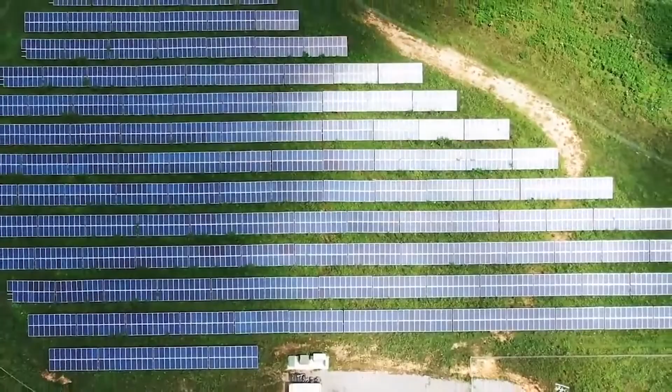The NATRIUM reactor creates heat, which is used to increase the temperature of molten salt. That salt is then deposited in a hot salt storage tank. Operators independent from the reactor can use the heat to generate electricity immediately or reserve that energy for later.

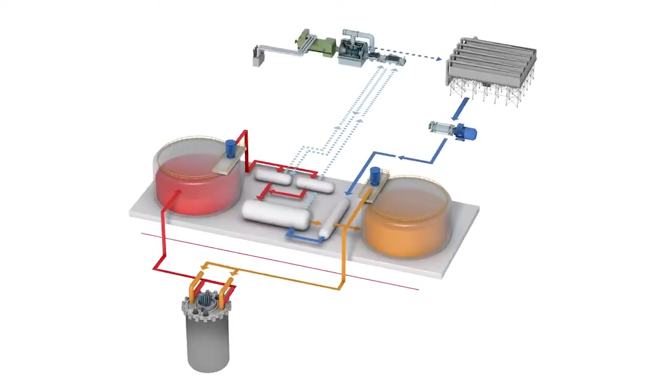The stored heat allows the NATRIUM system to be uniquely flexible. It can rapidly ramp electricity production up or down based on demand or the availability of renewable sources. The NATRIUM technology will be available as early as the late 2020s, making it one of the first commercial advanced nuclear technologies. Learn more at natriumpower.com.

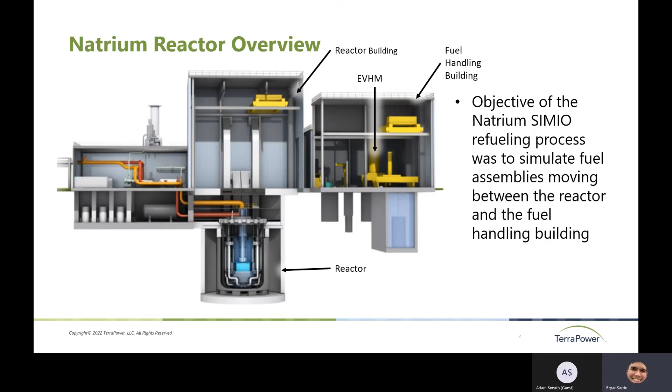And then once again, as the reactor emits or discharges fuel assemblies, the EVHM, which is on rails, can move it from the reactor area back onto the fuel handling building for processing. So it's an exchange of fresh fuel assemblies and discharged fuel assemblies, ones that have lived their life and provided as much power as they're going to the grid.

Hey, Bryan, can I jump in with one additional point? Hey, everyone, Adam Sneath here from SIMIO Solutions Engineer. I've been working with Bryan on this project. I think it's been a great application of simulation because it's allowed Bryan to create different scenarios, and create scenarios around the different parameters in the system, the processing times and so forth, to see how that overall time span has been affected. So I think that's really been an effective use of simulation to address the business problem. Just my 2 cents there. Back to you, Bryan.

All right, great. So one of the things that was particularly important for this model was the use of graphical representation for the fuel handling building and the reactor building and the various components moving those fuel assemblies back and forth. We even were able to implement fuel assemblies to scale in the simulation itself.

So in taking these two buildings, they needed to be to scale. In order for us to do that, we were able to bring in various models from this program, AVEVA, or if you have SolidWorks programs, or rather parts, you can bring those in and ensure they are to scale.

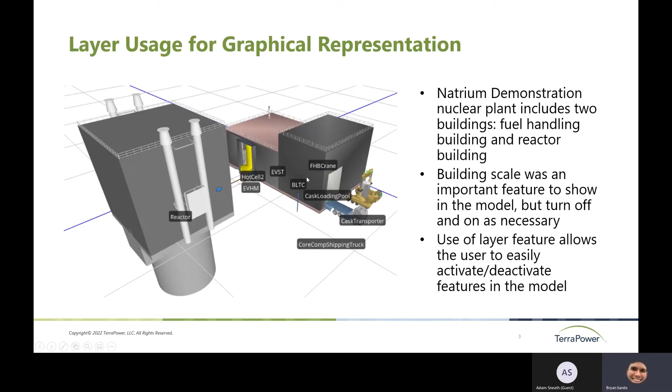So I'll just show real quick what it looks like in the model, how easy it is to use these layer features and then deactivate and activate them as well. Oops, got the wrong window open here. Let me just minimize this.

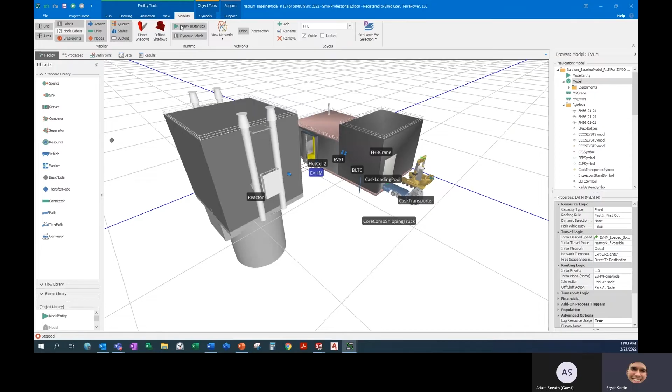So as you can see up here, we have symbols, but ultimately you want to be on the ribbon for visibility. And when you bring a specific component in as an object, or rather as a symbol, you can turn the visibility on and off.

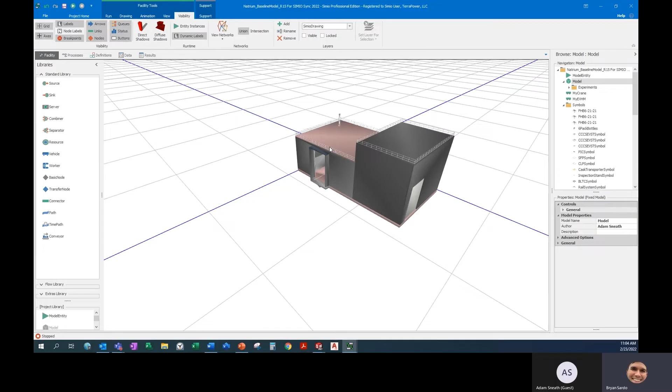So as you can see here, I have a layer called Fuel Handling Building, FHB, and I also have the reactor building layer. And then we went a little bit further and added some. With our SIMIO drawing layer, we basically have all of our SIMIO objects built onto this layer. So you can quickly turn those on and off too if you just want to see what one particular item looks like, the fuel handling building in this case.

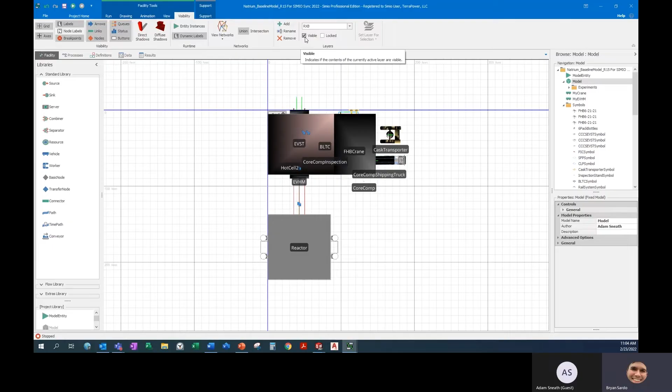So like I said, when you have these buildings on and you're looking at a 2D rendering of your simulation, if I hit run, you wouldn't see very much because everything's happening on the inside of the building. So while we're doing the run and making our recordings, we turn these layers off so that you can clearly see what's going on as the refueling unfolds.

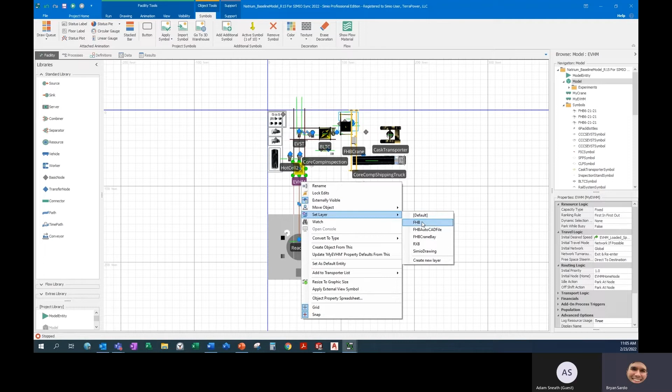One thing I didn't note so far is how easy it is to change a layer. You can pretty quickly right click and hit set layer and change whatever it is that you'd want. So if I change this to fuel handling building, it would disappear because we don't have it visible at the moment. So that is also something you want to be aware of while you're using layers.

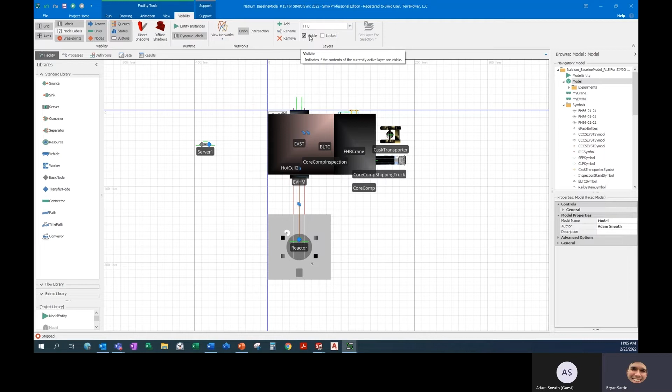You want to be mindful of which layer you are on as you are creating items, because if, say, you are on the fuel handling building layer and you bring a server in, well, the server is not there. That's because it was built back in the fuel handling building layer. So if you did goof up, and that might have happened, you can right click in here and turn it on to one that was visible at the time.

So now we have server one still being visible because I changed this layer to SIMIO drawing, which going back to the layers is shown here as visible. I believe that's all I have on layers at the moment. Adam, do you have anything you wanted to add to that?

Sure, just one final point there is that this feature was put into SIMIO about a year ago. I just pulled up the release notes to remind myself. So if you're seeing this and you're not sure if you have this feature, you can always check the release notes from the support ribbon, which outline all new developments. We release a sprint version of SIMIO every 3 weeks, which really diligent users may choose to stay up to date with. We have a major release about every 6 months.

But features like this in particular may be a good reason to stay up to date with your version of SIMIO. And if you ever had questions about how to update SIMIO, you could reach out to support@simio.com for a little bit of help. But yeah, looks great, Bryan.

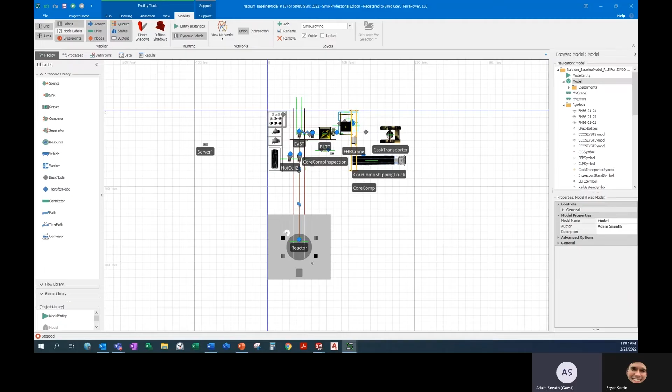Thanks for sharing that feature. Anytime.

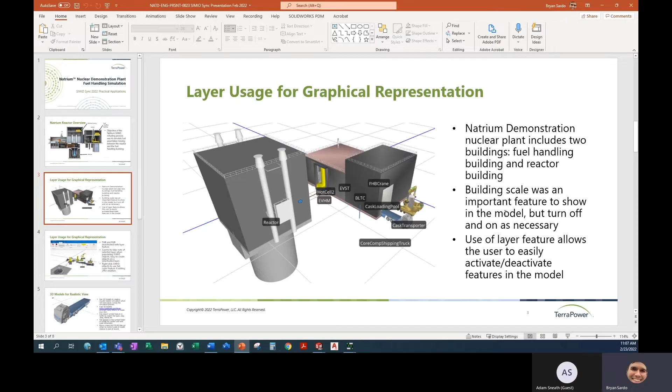So going back to the slideshow, like I said, it's easy to activate and deactivate the features. Let me just make sure I haven't missed anything here. Nope, looks like we have everything we wanted to say about that. I kind of just went over this while we were in the model. It's very, very important to make sure you know what layer you're on, and you can always right click and edit the layer after the fact if you maybe built it in the wrong layer.

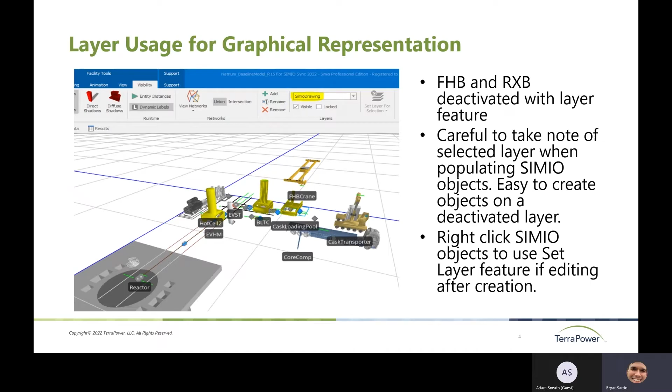The next feature that I like to talk about is use of 3D models for a realistic view. With the first few models that we built, we didn't have a realistic view to our simulation, but it quickly became apparent that it took longer to explain what it was that was going through the fuel handling building and in and out of the reactor. So it was important for us to understand how we could give it a realistic view.

And while that may sound like something that isn't necessary to have a good or very accurate simulation, that might be true, it doesn't change the accuracy of the simulation. But it helps those that are reviewing and have no idea what Simio is, or just need to know what is going on in the simulation. For instance, we have investors that are investing in our company, and they need to know what is going on in the simulation. So we wanted to create a realistic view, and ultimately we were able to do that by conveying the simulation process.

If you don't have 3D models, I recommend you go to a link such as the one that I posted here in the presentation. There are a number of other 3D model generators where you can get free 3D models and implement them directly into your simulation. And you can use the import symbol feature in Simio to import all sorts of file types like STEP files, DWG files, Blender files. There are many. OBJ file is another one that we used quite often. The file itself will appear in the symbol folder on the right, and you can do further color and scale refinement. And I'll come to that bullet point after I show a little bit in the model here.

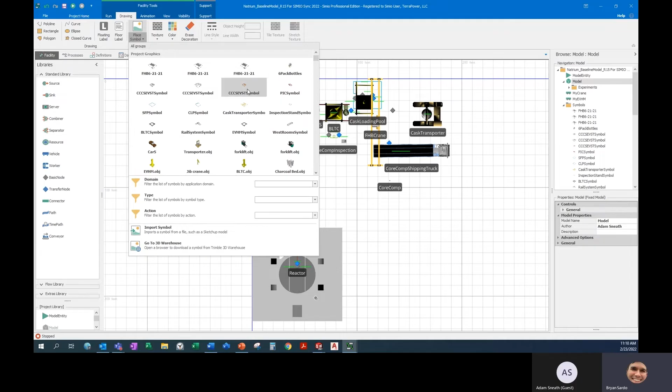So like I said, underneath the drawing ribbon, you can go here to place symbol, and you can see all the various symbols that we have pulled in. The ones that you pull in typically will show up at the very top, and you can use the import symbol feature to grab your file. Sometimes you won't see that file, so you may want to go back to the original spot where the file was generated and make sure that it is in a compatible file format like the ones I mentioned in the presentation slide. When you do pull them in, they show up on the right-hand side of the symbols. And you can see we went pretty crazy with our symbols.

Probably didn't use half of them. I mean, we certainly didn't use the Tesla Cybertruck, but you can see that that is in an STL format. We were just playing around a little bit and found a Tesla truck that you can bring into a Simio model.

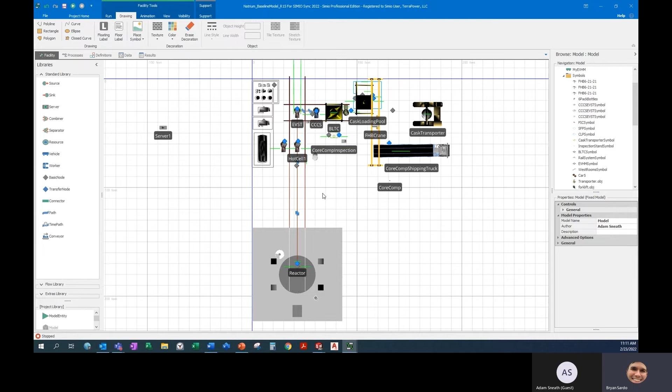When you do have that symbol pulled in, you can go into the symbol and edit the scale as necessary. And when you bring it into the model, if you were mindful about the scale as you were building the model, you can pretty quickly understand if your item is to scale or not. Using the scale on the upper portion of the grid here, you can see roughly what the scale is, and back in the symbol area, you can understand what the size of your truck is, or your cask transporter in this case.

One of the things that we did to begin with was we had an AutoCAD file that was showing a plan view of the fuel handling building and of the reactor building.

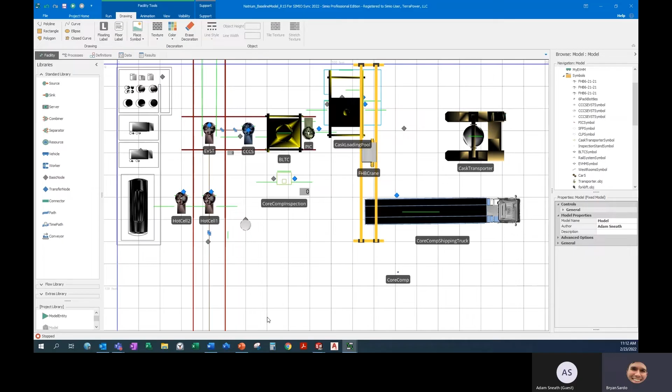And we brought that in because it was a very detailed plan view. It's not shown here in the model because it just very much clutters your model, but you can bring it onto a layer that you can turn off later. So for us, we called it FHB AutoCAD file, and we did the same thing for the reactor building as well. And then you can line up that plan view pretty accurately with the scale on the model, on the facility outline. And ultimately what will happen is it gives you a point of reference for the entire time that you're drawing your SIMIO objects or bringing in symbols.

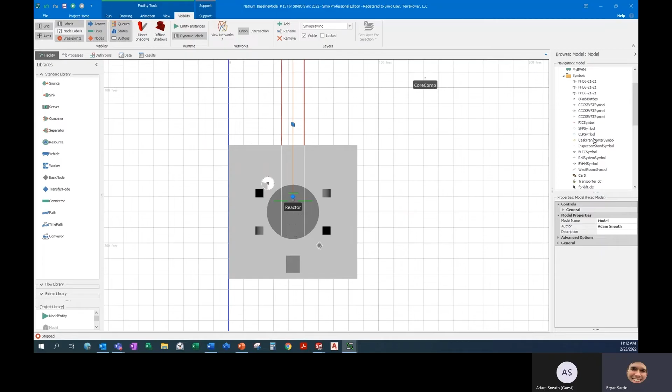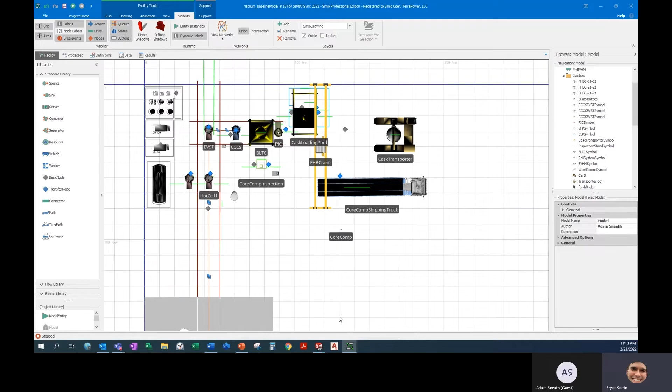So that was one of the things that I think really helped us out with the scale of the model. You can see some of the remnants of it over here on the left-hand side. We don't use this very much in the simulation, but if you are going to do that, occasionally you will have issues with clicking onto various objects. So you may want to clear that out once you are comfortable with the scale of the AutoCAD file or whatever file it is that you're using to confirm scale of your model. Let me see if I have anything more left on that slide here.

Yeah, one of the nice things is occasionally your symbols will come in and they will be in grayscale. I think that there has been an update to that in SIMIO, but if you use something like an STL or a STEP file, occasionally it'll come over and it won't have any color. So you can either re-implement the import using a different file, or if you're comfortable with, say, this truck, with just some coloring so that it's not all grayscale, you can pretty easily edit the color in the symbol feature in SIMIO. I think that is all I have on this slide.

Adam, did you have anything as I was going through? No, it's great. I'm glad you touched on the scale. Well, I guess I should have said yes. Just a quick point or two.

I also use 3D Warehouse quite often to get free 3D symbols that you can import nicely to Simio. So that's just 3D Warehouse. You can Google it. And I think this model is a great example of just enough animation to get the job done. And Bryan really nicely explained why that's important for stakeholders and consumers of the model. As the technicians and the analysts, we're focused on the results and the number crunching, but adding some of this realistic view can really help people who are not familiar with the simulation understand and intuit what's happening with the model and ultimately have more faith in the results of the model.

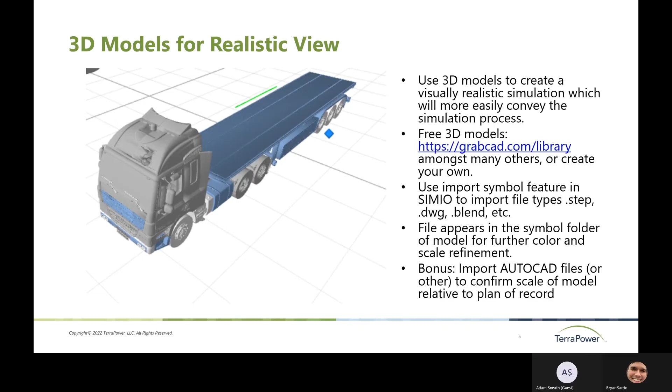Very good. Back to you. Great. Thanks, Adam. Okay, on to the next slide.

I think this is the last major topic that we have to talk about in the practical applications in the Natrium refueling model. But this one was pretty important in that we wanted to, when a fresh core component goes from the fuel handling building onto the reactor and then is discharged as a discharged core component, so it's not truthfully the same entity. It is in SIMIO terms the same entity, but in terms of the simulation, it's actually a fresh core component going into the reactor and a totally different core component or fuel assembly coming out of the reactor. But to simplify the model and the simulation, it's effectively the same entity that changes color from blue to red as it comes out as a discharged core component.

And our ex-vessel handling machine needed to be seized at the reactor while that exchange was taking place. So we found that the use of a worker, in this case, instead of a vehicle, achieved that goal because the technical details are that the ex-vessel handling machine will be prioritizing a seize request over all else. So it was easier to orient the worker rather than the vehicle in this case. So we used, like I said, a worker instead of a vehicle.

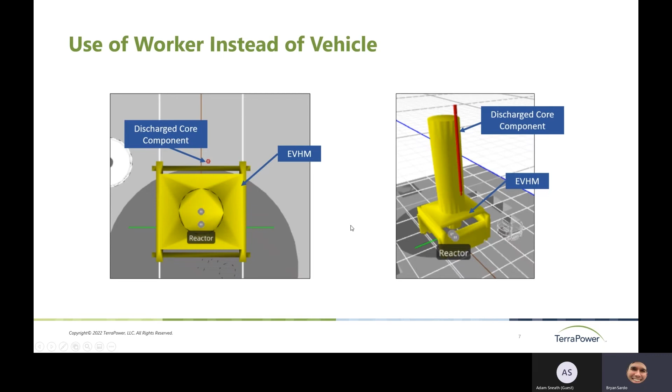And one last tidbit is just that we're able to, once again, just change the color. So it was yet another really nice graphical representation. Okay, I'm discharging this core component, which is red, because radioactively it's very hot at that time. So red is a very easy way to represent, okay, we're not going to be near this at that time.

It's coming out of the reactor, where this fresh core component coming over wouldn't necessarily be radioactive or as radioactive. So it was a nice visual for everybody to see, okay, this has gone from fresh to discharged. And Adam, I think there was something you'd like to show off in the model a little bit at this stage, if I'm not mistaken.

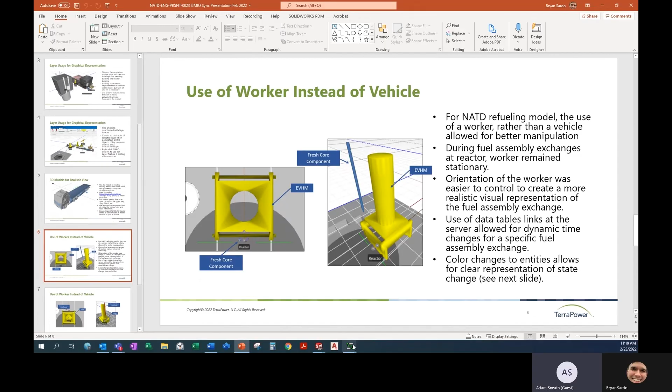Perfect. Yeah, if we can flip back to the model. And so let's select, and I think we layered it elsewhere. You may remember where it has gone to with our layers. Sweet. Yes. Okay. Great. Go ahead and set the layer a little bit differently, so we can look at it a little bit more easily.

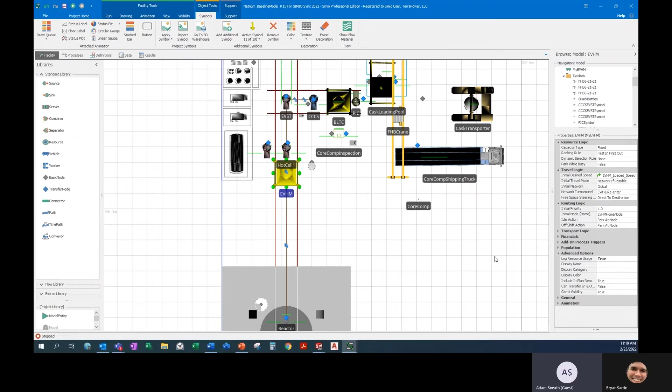There we go. Beautiful. So you all can see when Bryan selects the EVHM on the right-hand side by our properties window, this is a custom object of type my EVHM. Then Bryan, can you click into that custom object's properties, just so we can confirm its parent object. So now we can see the second line there under the advanced options says parent class worker, right? So this started as a worker and we've created a custom object from it.

Now, can you pull the help doc up as well? I just want to call that out. I realized as we were going through, I will ask you to search worker instead of vehicle. There is a very similar help topic for worker discussion and examples. If you just do worker, it should be the first thing to pop up. Awesome.

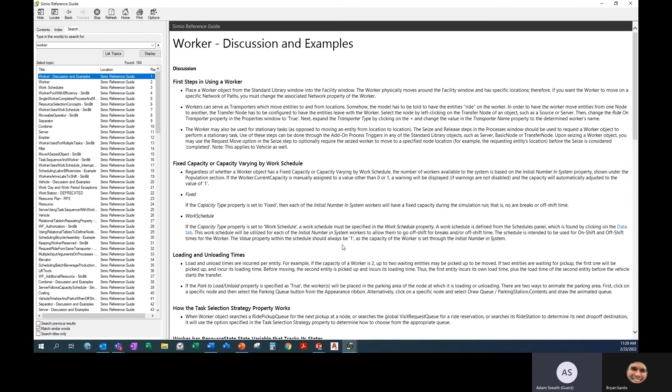So yeah, any of these discussion and examples help topics, just as a side note, relate typically to standard library objects. For instance, you have a source discussion and examples help topic as well. I find myself coming back to these because they have a lot of example ways you might use this object or things you might run into.

And here we see, for instance, seizing a worker for non-transport tasks. So what's really nice, if you know about it, with the worker and the vehicle really, you can use them for transport tasks and non-transport tasks. The seize or non-transport tasks will always be prioritized first.

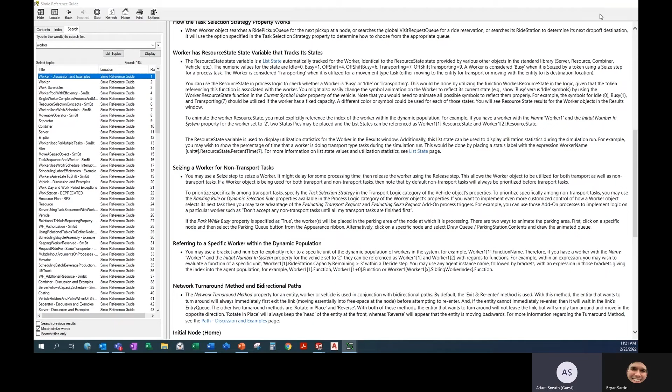Now, Bryan, can you go back to the model for just one more sec and click the EVHM again? Just one more thing I want to call out. So back in our facility view, great, on the object itself. Yeah, so let's see, in the travel logic and the transport logic. Can you expand the transport logic category on the right?

I want to see if we used, no, so maybe can you grab the crane? I know we did it there. Okay. I thought we had, but anyways, you'll all see in that transport logic category at the top, we have a task selection strategy. So that selection strategy pertains only to transport tasks. So another thing we've done in this model, and I think it's in a newer version, is we've created priorities for the different moves, right?

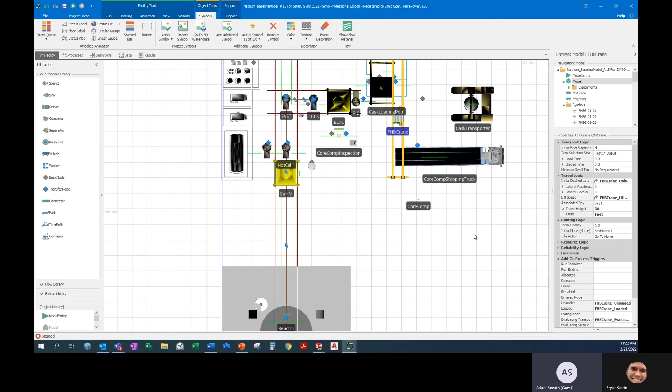So if there are two competing crane moves, we assign model entity priority higher or lower so the crane knows which one to select from its queue of transport requests. However, any seize requests on that worker or vehicle would come before any of those transport tasks. So just wanted to explain that a bit and also point out the help doc so you can reference it. But it's really important to think about how those requests sort of rank against each other so that we can control it the way we need to.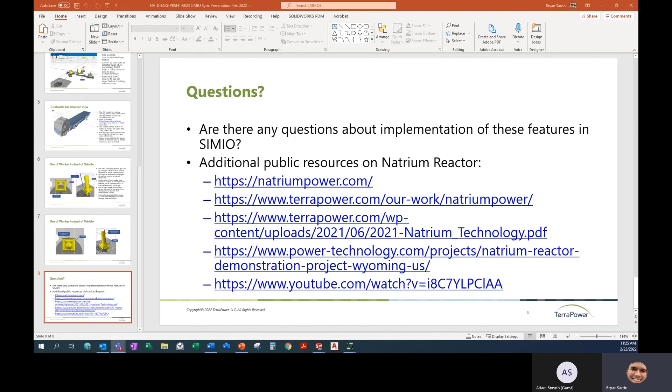Due to the time constraints today, we do have only one question for you. Can you elaborate on the importance of these simulation results? How costly are unexpected delays during the refueling cycle? Sure thing. Eric, can you hear me? I can hear you. Okay, great.

So it really depends on the reactor and how much power is produced out of that reactor. But the value that has been thrown my way in the past has been a refueling costs $1 million per day. So dividing that by 24 hours is quite a lot of money, even if you only have a 1 hour delay. So as a result, any delay to our refueling goals results in money lost, and also less power being provided to the grid in any given year.

So that's why such an emphasis is placed on how long a refueling is and how long a reactor is down. I live maybe 2 towns over from the Millstone reactor plant, which is one here in Connecticut that produces 2 gigawatts of energy. And we have friends that work there, and they're on call for 24 hours a day, sometimes sleeping at the plant during those refueling periods. So it's a really important time to get right. And that's where this simulation certainly has been helpful for us.